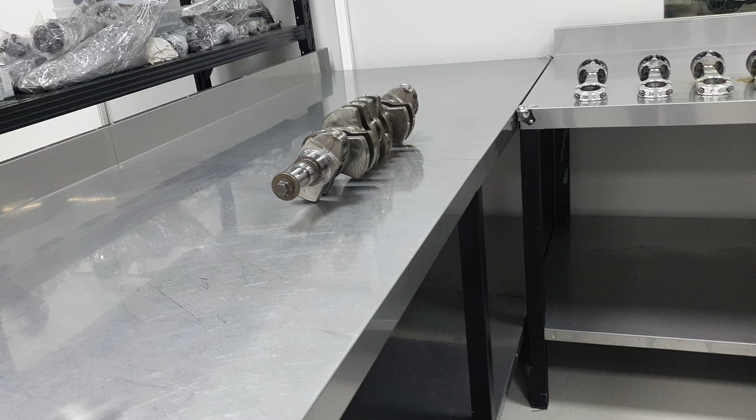A small update. You cannot put it all in the same bag. You cannot say that all of them are the same.

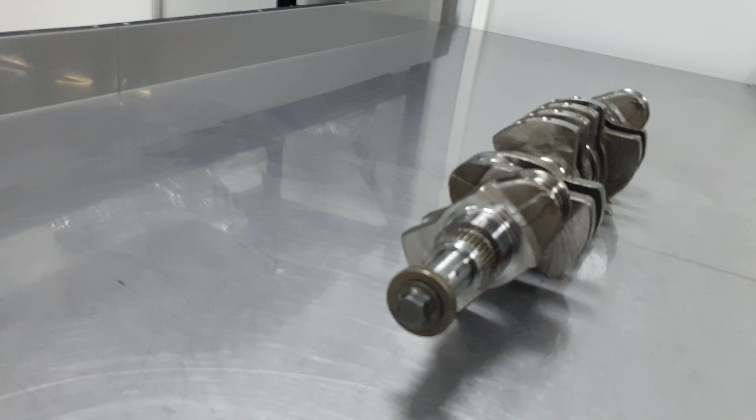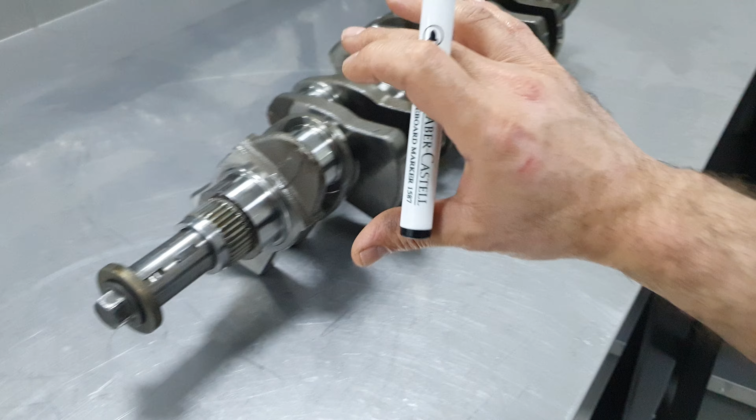What do I mean by that? It's very simple. Take a cross-plane crankshaft from a V8, like the 157 over there, where the journals are 90 degrees apart. I don't have to do all these things, like put the bob weight to get the weight from the piston and connecting rods, put it on the machine, put the clutch back and the damper pulley, then spin it to check if the crankshaft is balanced. If you did, you'd see it's gonna be all over the place.

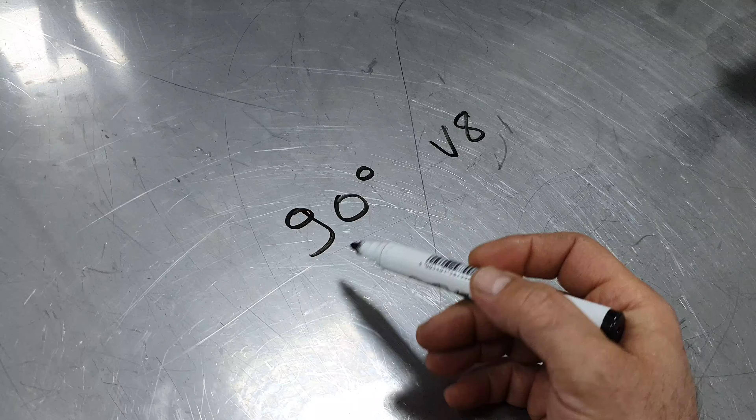So I don't have to do all these things. So, V8 90-degree configuration: the cross-plane crankshaft has the journals 90 degrees apart.

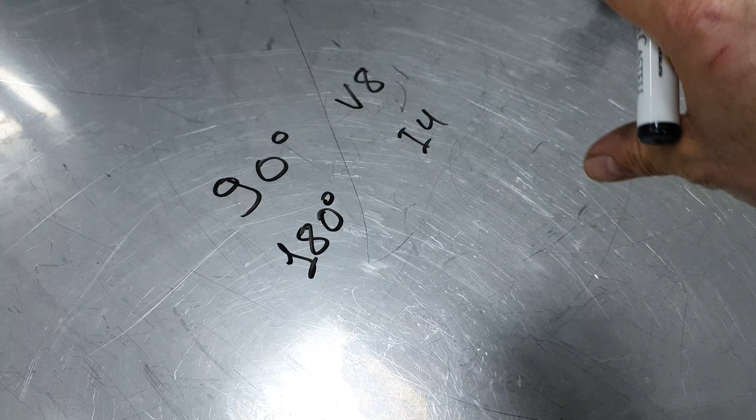On a 4-cylinder inline 4, it's 180 degrees apart, a flat plane crank, classic firing order 1-3-4-2. That's why you need balance shafts for the middle range RPMs, because it's unsteady, then it comes in nice and smooth at higher RPMs, and it's beautiful.

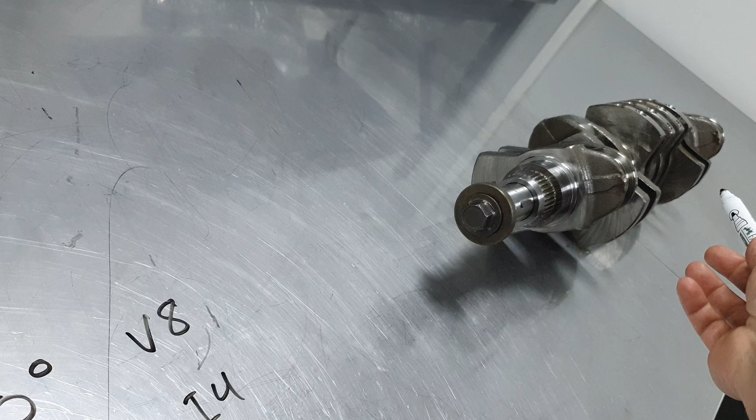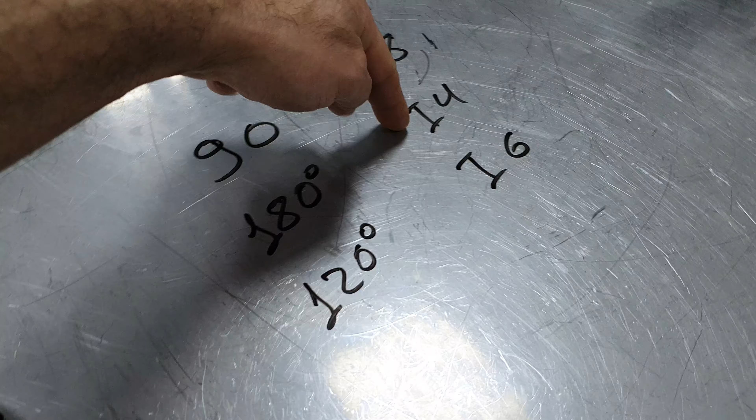On the inline 6, the crankshaft journals are 120 degrees apart. So you cannot compare the V8 cross-plane crank with the inline 4's 180-degree flat plane crank, and with the inline 6's 120 degrees apart. It's wrong, it doesn't apply. It's not the same thing, all right?

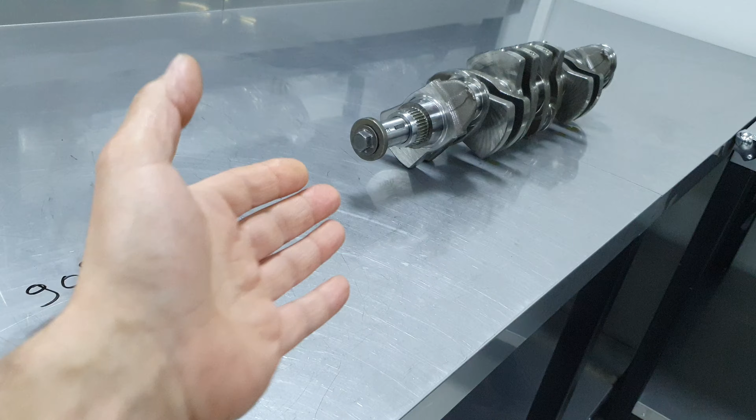Why can you rev it so high? One of the reasons is the balancing of the crankshaft. I'm gonna give you an example.

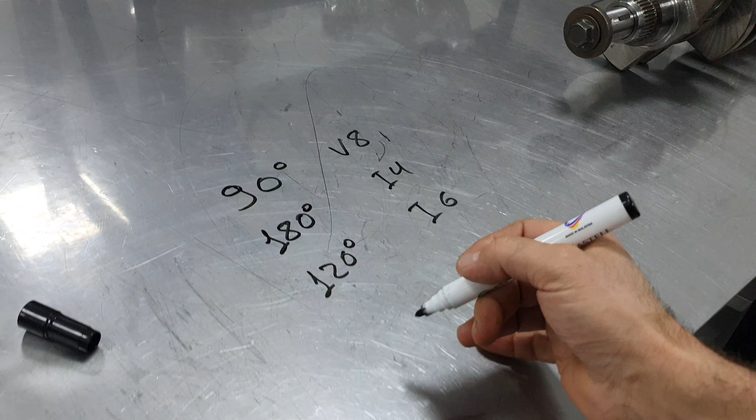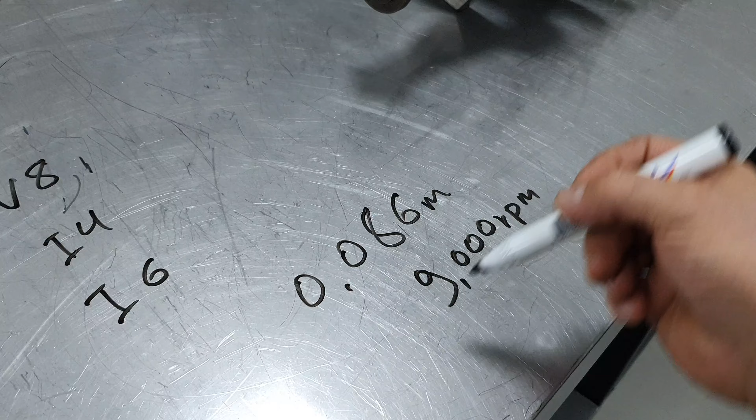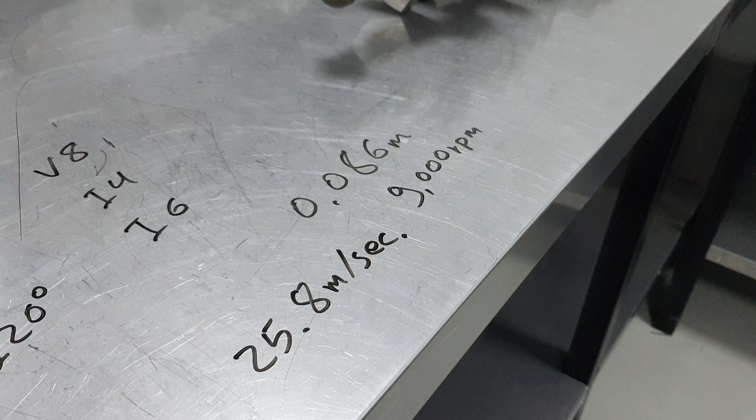We have a stock stroke on this crank, 86 millimeters if I remember right, on this specific one. At 9,000 RPMs, the 86 millimeter stroke, which is 0.086 meters, gives a piston speed of 25.8 meters per second. That's the piston speed at these RPMs.

If you understand this and what I'm saying, it's gonna make sense what you see on the bearings. In any case, let's continue.

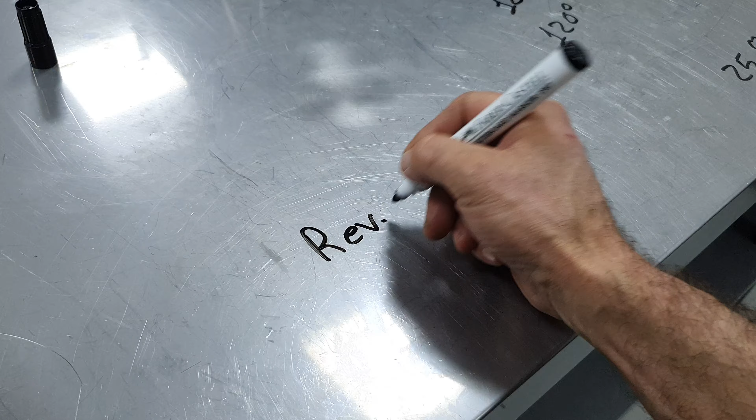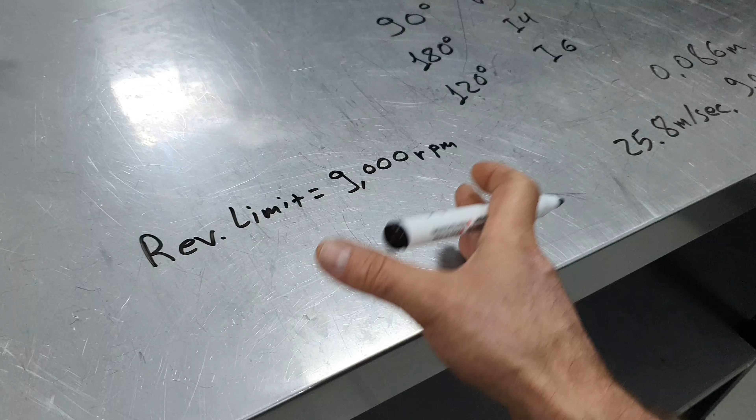Let me write down some numbers. Rev limiter, 9,000 RPMs. What I'm writing now exists on this car, and I have actually worked on this car before - it's been more than 20 years, but I have worked on these cars before.

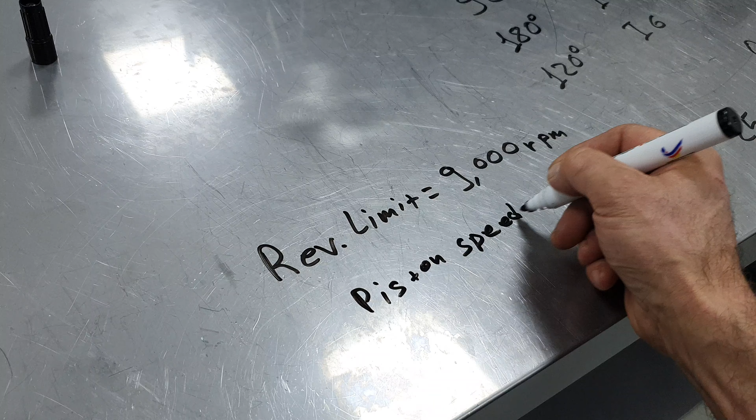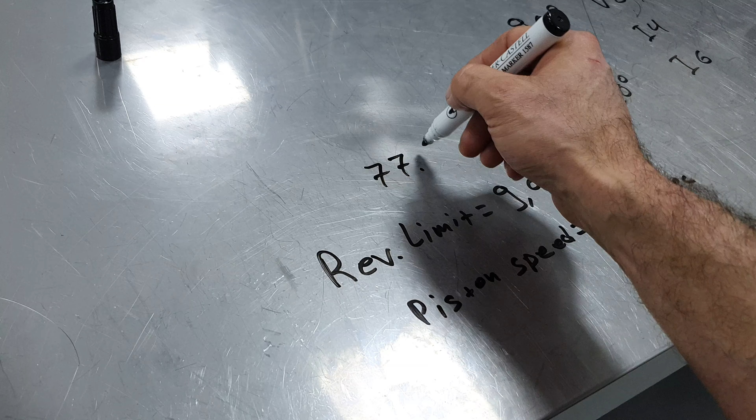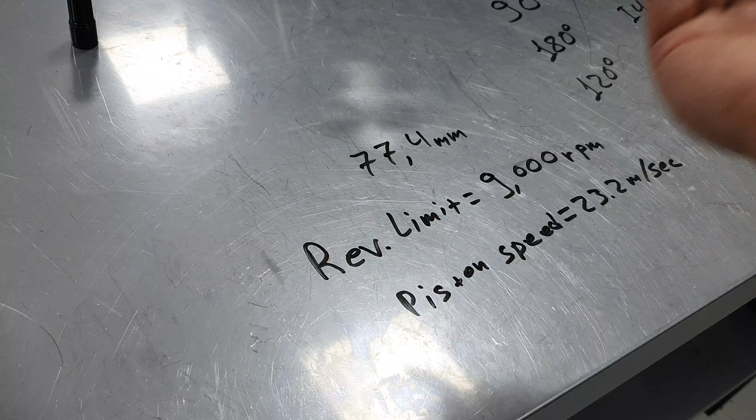Rev limit, 9,000 RPMs, piston speed 23.2 meters per second. Why? Because the stroke is 77.4 millimeters. That's why it's 23.2 meters per second at 9,000 RPMs. Why? It's a dual overhead cam - I'm talking about the B16B, Honda Civic Type R.

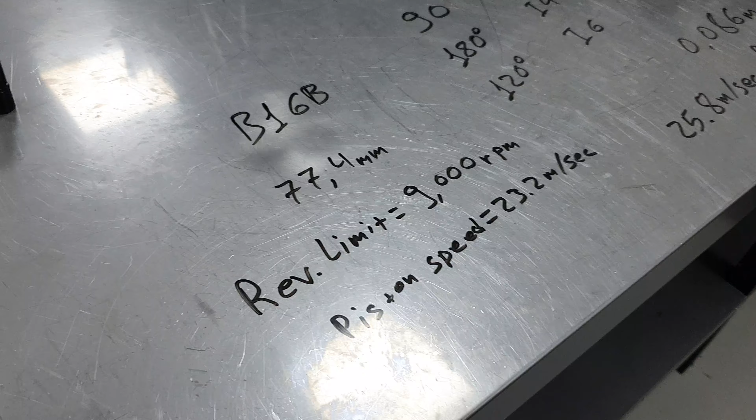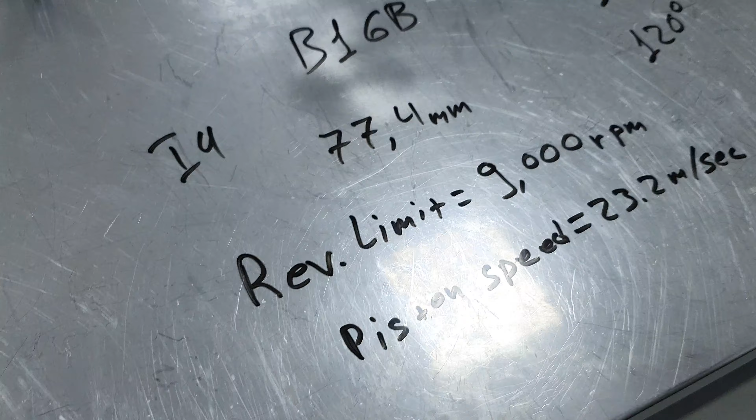99-2000 model year, we had plenty in Greece - I don't know if it's still around now. Inline 4, but in this case it's a different crankshaft, a flat plane crank. You have a 77.4 millimeter stroke, and at 9,000 RPMs that's 23.2 meters per second. Compare that to the other case with an 86 millimeter stroke, which at 9,000 RPMs gives 25.8 meters per second.

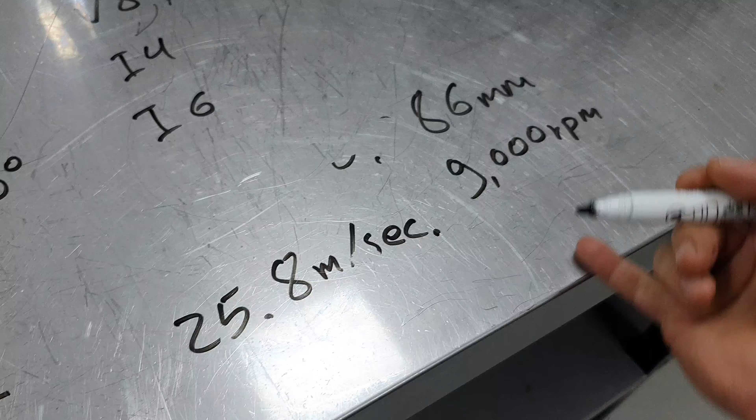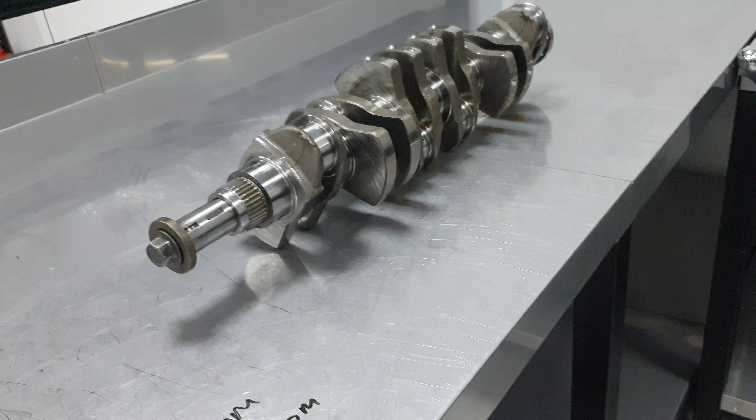In this world, the mass, when you spin something up, it's like - how do I explain this - if you put an apple in a net and start spinning it fast enough, it's gonna explode. The same principle applies to the rotating assembly, the pistons and connecting rods and all these things. You're gonna reach a point where it starts to deform, and the next step is explosion - it comes apart. That's exactly what applies here.

It's not my rules, it's not my laws, it's just how this world works. Once again.

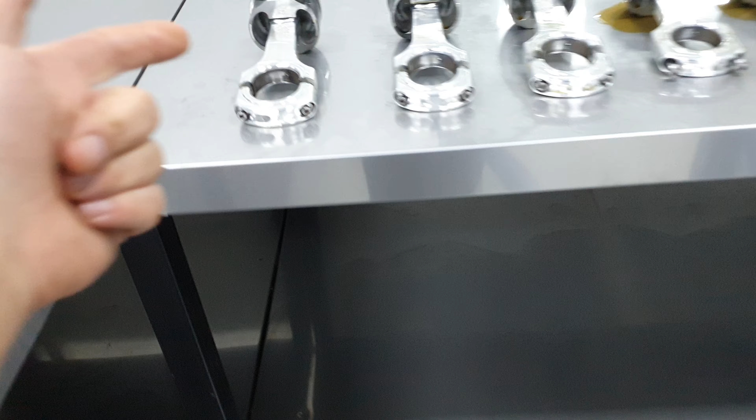That's why I'm saying billet steel connecting rods would be much better. You're gonna have much more mass surviving at 9,000 RPMs. You might not need to rev so high for safety, because they could deform, but with billet rods it's not gonna be that soft. So you have to balance it, find the sweet spot. But in any case, that's not my call - just answering the question.

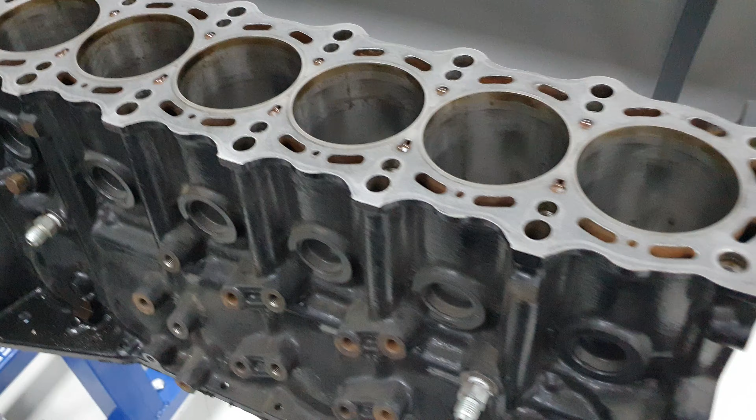Now, like I said before, I'm going to take this to the machine shop. I wanna see this crack, check what's going on, how deep it goes. Does it go to the threads? We're gonna have a problem here. What in hell is going on here? It's far away from the cylinder, but it's not good to have these kinds of things.

In cast iron, guess what? It's not gonna stop there. It's gonna continue - you have thermal expansion, vibrations, pressures. It's not gonna stay there.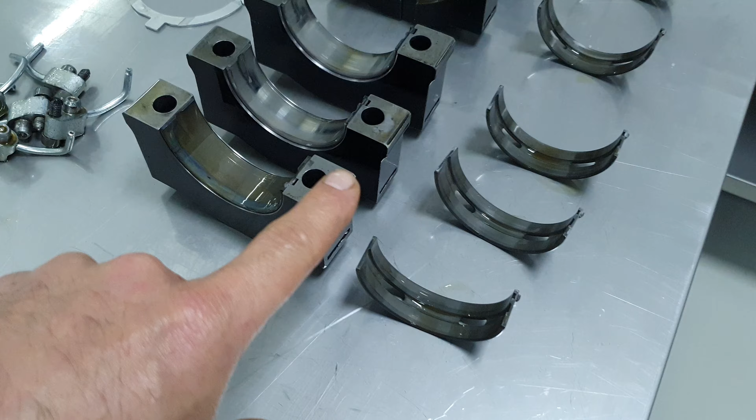On the other hand, I can tell my friend, bring me a stock block that's nice and healthy, and put it on. The thing is, after that, what it takes is we need to machine the crankshaft bearing caps to remove, let's say, 0.25 or half a millimeter, and then re-machine the main line, because these are billet caps, not the stock cast ones - the cast ones might crack.

Yeah, okay, that's it, small update. I hope you understand. I hope I made myself clear. If not, I'm sorry. Move on. Thank you, over and out.